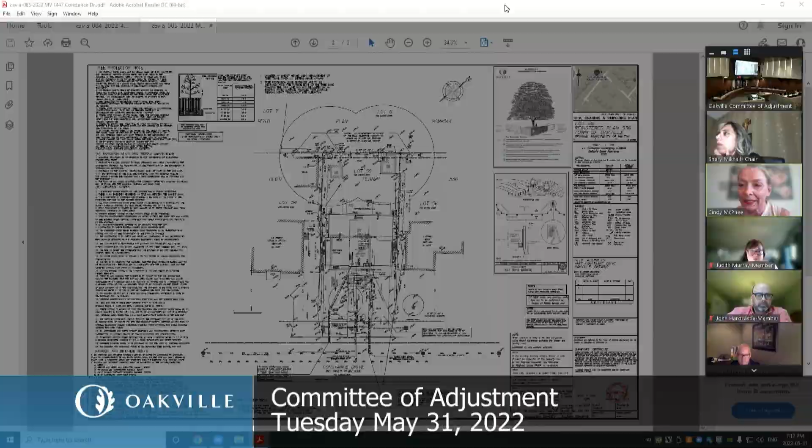I'm open to answering any questions the panel members have for our application. Very well, thank you Ms. McPhee. Are there any questions of Ms. McPhee at this time?

Would you care to comment on the issue of the tree? Is it being removed or maintained? No, the tree is being removed. We looked at that when we designed the property, and there are many trees on the property that are also being preserved. This is one tree that unfortunately is being removed because of the driveway location.

Okay, very well. Are there any other questions of Ms. McPhee at this time? Okay, Madam Secretary Treasurer, have we had anyone sign in to speak to this application? Madam Chair, if you can just repeat that anyone who wants to speak needs to raise their hand, that would be helpful. Okay, application CV 085 of 2022 at 1447 Constance Drive. If you are in attendance and would like to speak to this matter, please raise your hand and you'll be invited to the panel.

Okay, Madam Secretary Treasurer, if no one has raised their hand, we can take the matter into committee. There is no one. Okay, very well. Who would like to move a motion?

Okay, let's see if Mr. Goral has fixed his issue, because I believe you've got 2 applications before us tonight, correct? Correct, yes. Okay, so this might have actually worked better for you, because the second one is actually up on queue right now. Let's start with the first one, CAV 084-2022.

You can hear us okay now, correct? Yeah, I can hear you, and you can hear me, right? Yes, I can. Apologize for the computer glitch. No worries, we all have those.

This is application CAV 084 of 2022 at 411 Inglehart Street South. It's a new dwelling with a detached garage accessory building. We do have 2 letters of support on file from Laura and Patrick Burke, and Derek Woolman and Jennifer Chapman. Go ahead, Mr. Goral. Yes.

Good evening, Chair and committee members. My name is Tomasz Goral, and I'm the applicant for homeowners Erica and Paul Main at 411 Inglehart Street. This is our second time here. We were here before, we didn't win that time. We had 7 variances, went back to planning and worked with them. We've reduced it to 4 variances, which we do have their support for. I can go over them, but I also sent in a rendering.

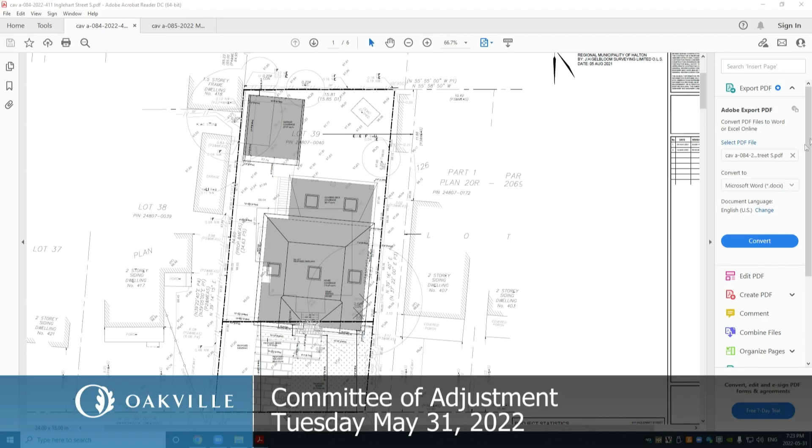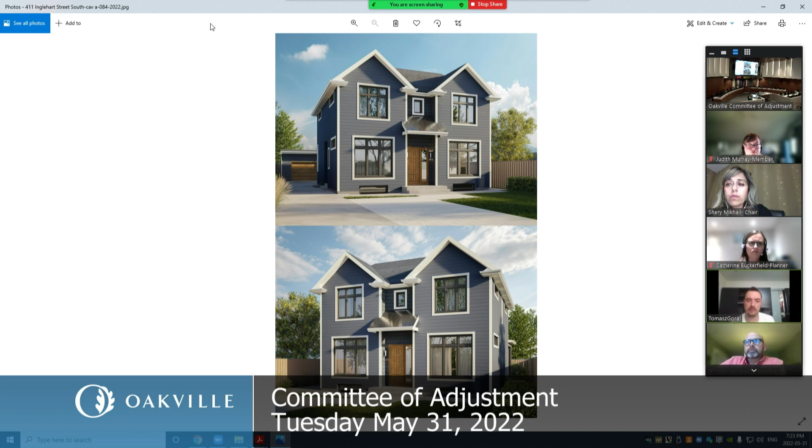Does the rendering show? You guys have that on file? Town staff, do we have the rendering for this application that was sent in? To Madam Chair, it's going to be up on the screen in a couple seconds. Perfect, thank you. Okay, so this is the dwelling we're proposing, the house we'll be building, with the garage detached in the back and the house in the front. If we can now jump back to the site plan, we can stay there for the rest of the presentation. Very well, thank you.

Okay, so one of the main drivers on this project was the garage. Originally we had it closer to the property lines. We've adhered to the 2-foot setback, so we have no variances for the garage. Because of that, we have to have the 2 meters between the garage and the house, so the covered porch was reduced in size, which is variance number 3, the lot coverage, that is less now than before. Number 1 was the window well, which we're still asking for as before. Number 2 is the 0.7% more of the area of the home. And the final point, number 4, is the front yard setback - we're asking for 8.19, because of the stairs in the front of the home.

I spoke with zoning, and even though it didn't have a cantina in the basement, because it's a covered roof, that's where the front yard is calculated. The dark line is where the front yard setback should be. As you can see on the left corner, we comply with the front yard setback there, and then it just kind of pies off. The reason the house is shifted is because the property is angular, and that's why we're asking for 8.19 for front yard setback.

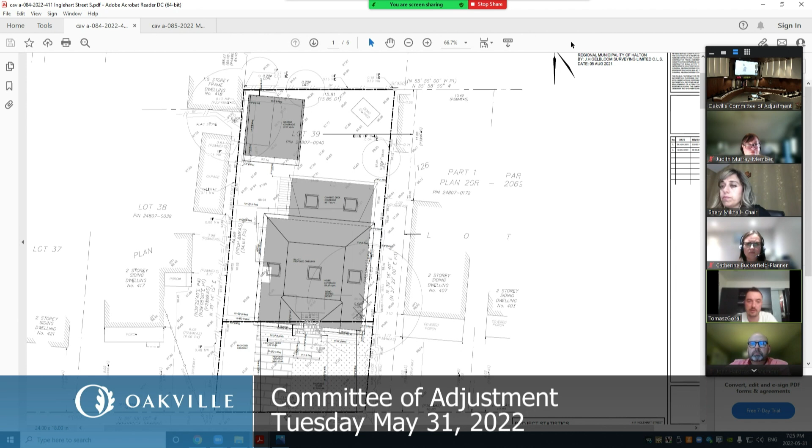So we have the planning support, and I hope we can have committee's support as well. Okay, very well. Are there any questions of Mr. Goral at this time?

Okay, I see none. If there is anyone interested in speaking to this application, please raise your hand, Madam Chair, and you'll be invited into the panel.

Okay, if no one has raised their hand, Madam Secretary Treasurer, we will take the matter into committee. Madam Chair, I'm sorry, I didn't see you there, Mr. Hardcastle. I apologize.

No, I just had a quick question of clarification with respect to the site plan and the walkway. I see that the walkway is relatively wide. Is that in fact a walkway beside the driveway? And if so, is the intention that it would be flush mount with the driveway and function as a driveway area?

Mr. Goral, I believe that question is to you. So they're pavers next to the asphalt. They're permeable, and we're going to have grass in between the joints. It will be level with the asphalt driveway, but the intention is not to use it as a parking pad.

However, if they're having a party, maybe someone will park there, but it's not for their personal use. They won't be using it as a parking pad. No, it's more of a decorative feature.

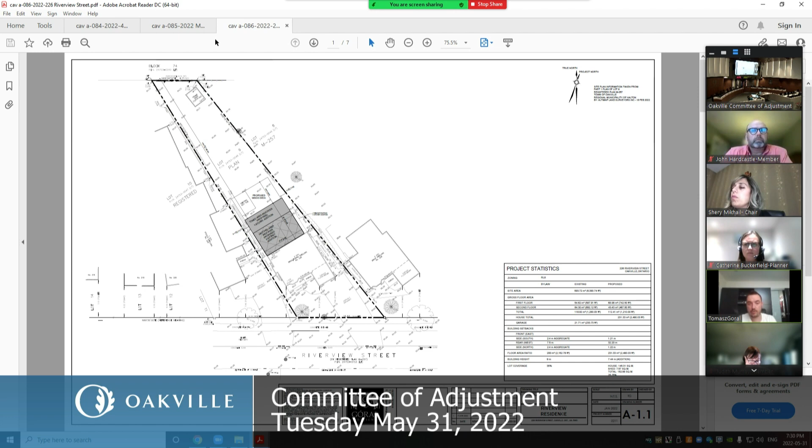I'm the applicant for Jeffrey and Christine Budd, the owners of this property. We're only asking for one variance. Originally, when designing this, we were under the impression this fell under the -0 suffix zone. The area of the property is 593 square meters, and you're allowed 42%, which translates to 249 square meters. Talking to zoning, we realized that's not the case.

This is actually an RL8 zone, and we're only allowed 200 square meters. We did talk with zoning originally. If we can look at the side elevation - those are the existing ones, and these are the proposed. The little bumper will be removed, and we'll just do a rear addition. Originally we had the addition all the way to the back, but working with planning, they asked us to cut back the second floor to where it is now. This is what we agreed to, and it's 231 square meters, 31 over. We hope to have the committee's support on this.

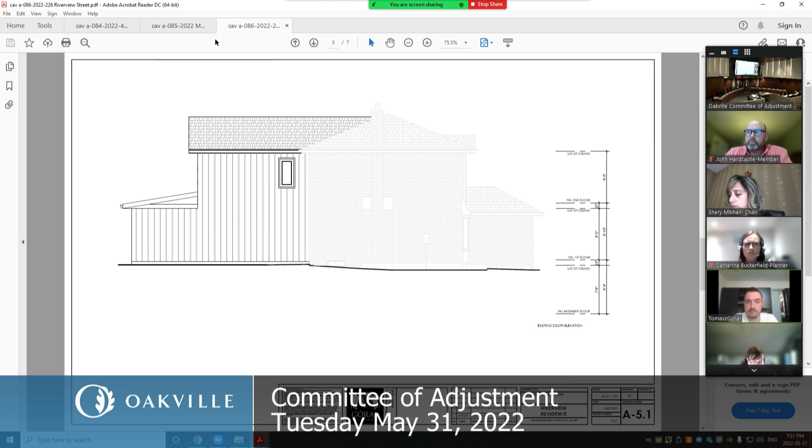Are there any questions of Mr. Goral at this time, or items of clarification? I see none. If no one's asked to speak to this application, we'll take the matter into committee.

Madam Chair, I'm prepared to move that this application be approved as applied for, finding that it meets the test of the Planning Act. Definitely some uniquely shaped lots, and as a result, the adjacent developments - I don't see any impact from the variances being proposed. I would note there is no objection from the community, and I would make that approval subject to the addition being built in general accordance with the submitted site plan and elevations dated April 19th, 2022, and the approval expiring if the building permit does not issue within 2 years.

Is there discussion on this recommendation? I see none. All those in support? Okay, your application has been approved, none opposed. Thank you very much, have a good evening. Good evening.

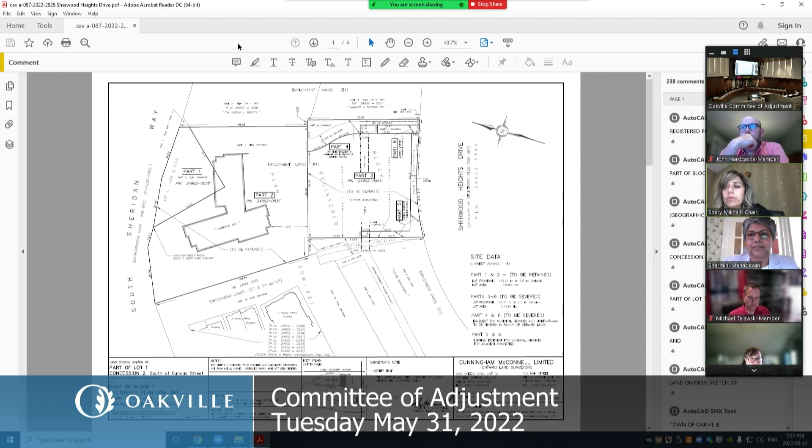Very well, thank you Ms. Mahadevan, I hope I pronounced that right. Thank you, Madam Chair, yes. Are there any questions or items of clarification at this time?

Okay, I see none. Whoever wants to move the motion, I'll kindly ask you to move a motion for each of the applications separately. Madam Chair, there has been no interested parties who would like to speak to this application, correct? Correct. Okay, very well. Go ahead, Mr. Flemington, I saw your hand go up.

Thank you, Madam Chair. Having reviewed the applicant's submission to the committee, as well as noting that the town staff written report is in support of the application, also taking into account that there was no comments this evening in opposition of the application. With regards to what is proposed, I do find it is minor in nature and meets the 4 tests of the Planning Act, and putting it back basically achieves the objective that the applicant and the town would support.

So I would like to move the motion for CAV A087 be approved as applied for, and I want to include the condition that the approval expires 2 years from the date of the decision if the proposed lot has not been created and received final approval.

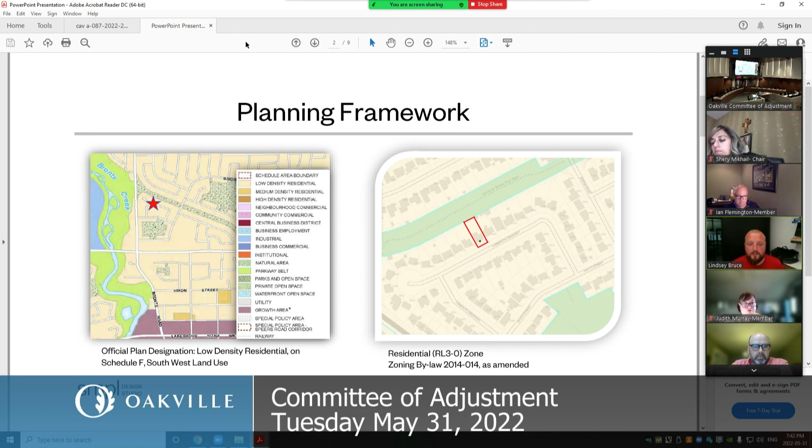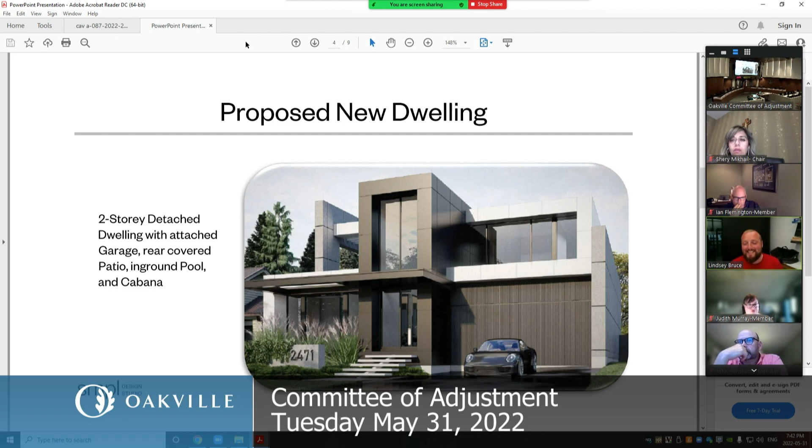Here before you is a proposal for a brand new single family dwelling, 2-car garage, concealed door on the right-hand side of the building envelope, a rear covered porch, front patio, in-ground pool, and a detached cabana. Next slide, please.

First request of variance pertains to the lot coverage currently as proposed with the cabana. We're sitting at 38.72% as our total lot coverage. Allowable permitted usage coverage is 35% in this zone.

The owners of the property, who are our clients, are going to be moving into this residence and living there full time with their family. We had a really good door-to-door session over the last couple of weeks and got letters of support from 10 neighbors. In addition to that support, there don't seem to be any objections from town staff. There are a couple comments pertaining to the height of an architectural pillar, as well as the encroachment of a window well into a side yard projection, which will be tackled in the building permit applications and grading plan process. So we're not concerned with town staff's comments on those items.

On the top image is the front elevation, bottom image is the rear elevation. There are no current proposed renders of the cabana. It is yet to be designed, but we do feel that based on what is starting to transpire on that streetscape, there is going to be some overall redevelopment of the zone over the next few years. We're hoping to lead the charge here from a contemporary modern design standpoint on Yarmouth Crescent. Definitely open the doors to any comments or feedback the committee has.

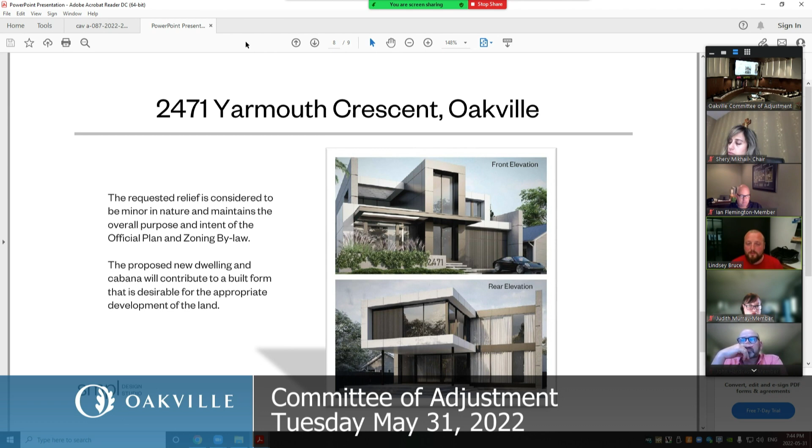I know there was one individual who was going to be joining just to listen in on the hearing this evening. There was also one letter of objection. We don't have the address, telephone, or email, so we're not able to pinpoint exactly where that residence resides. They might be here this evening to chat. It is Sandra and Rob Scott, and it is in relation to the cabana location in the rear yard and the requirement of the removal of the rear tree.

I just want to let the committee know that we've already retained Michael with GLN Farm and Forest. They are a local certified arborist company that does a lot of our planning applications and site grading plan applications. We do have a plan to remove that tree, but we are looking to replace it with substantial vegetation along the rear tree line. So as opposed to relying on one dominant tree, we're looking to replace it with several more dominant species on the rear property line to provide privacy between the Donovan Bailey Trail network and the pool that is going to be added into the rear yard of 2471 Yarmouth.

That is all. Okay, thank you, Mr. Tanner. And just for the public to be aware, you are subject to a development engineering site plan process review, so stormwater, trees, and all of that will be tackled at that point as well.

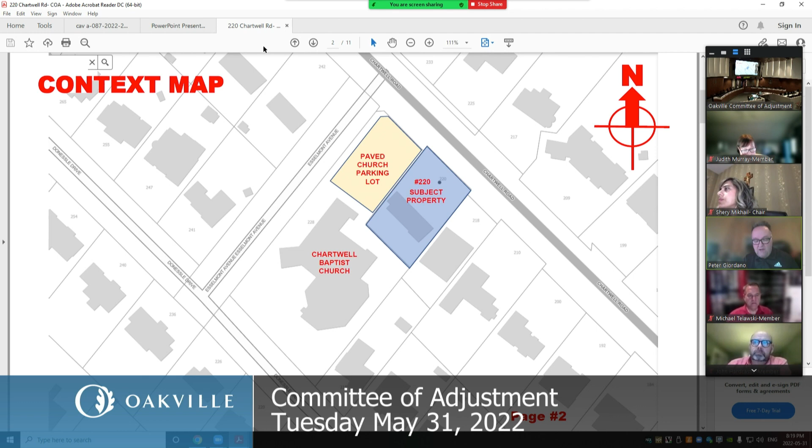We're here today requesting your consideration on 6 variance items. The context map displayed on your screen shows the unique placement of our property between adjacent residential neighbors at 218 and the Chartwell Baptist Church and parking lot to the direct west of us. Slide number 3, please.

The context aerial map shows the positioning a little bit better.

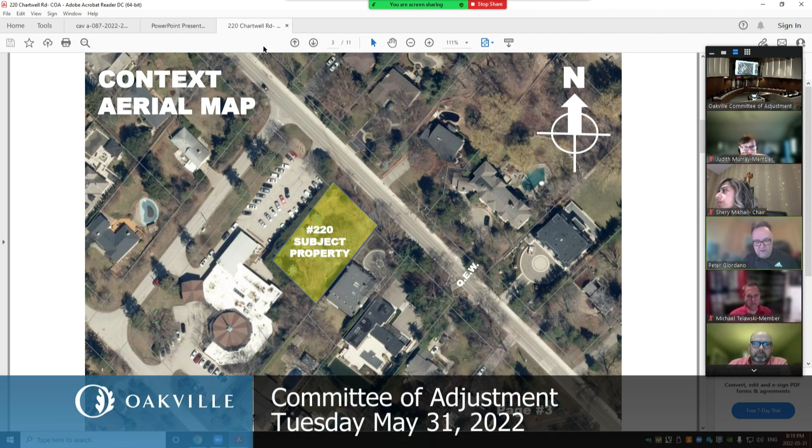Slide number 4, please. The next four slides are 3D elevations of what we're proposing. The important aspect on the front elevation is the stepping of the house, giving us an articulated front facade. We're asking for a front yard variance, which I'll discuss shortly, measured to the far right side. You'll see the articulation steps the facade back, and the two garages are secondary, positioned furthest from the front property line.

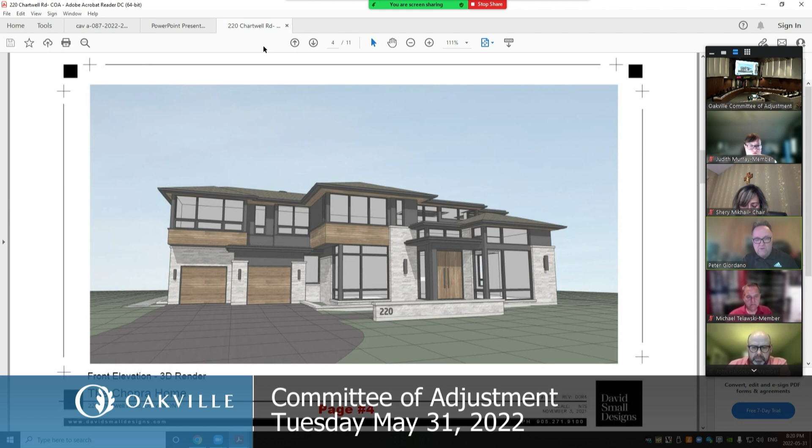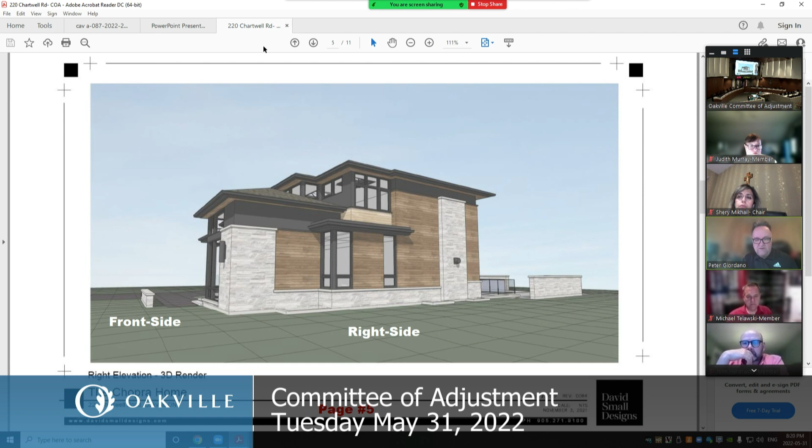Next page, please. This is the right side of the house, which faces the parking lot for the Baptist church. It's a well vegetated property with lots of trees on this side, not very many windows, but it effectively faces the church parking lot.

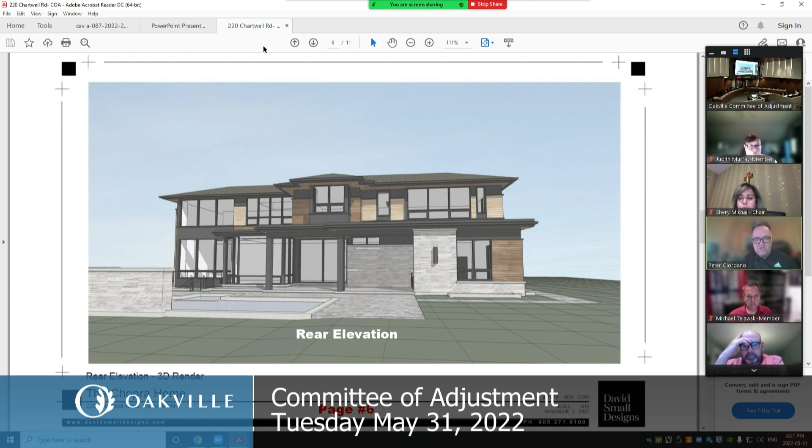Next page, please. The rear elevation has a covered porch, part covered and part open, along with a well-articulated rear elevation with a lot of facades. This faces directly towards the Baptist church, the rear neighbor of our property.

Again, a lot of vegetation in the rear provides privacy screening, which works out well for us. Next page, please. On the left side, this faces the neighbor at 218. We've purposely made the impact of this elevation smaller, so the amount of facade facing that neighbor is considerably smaller.

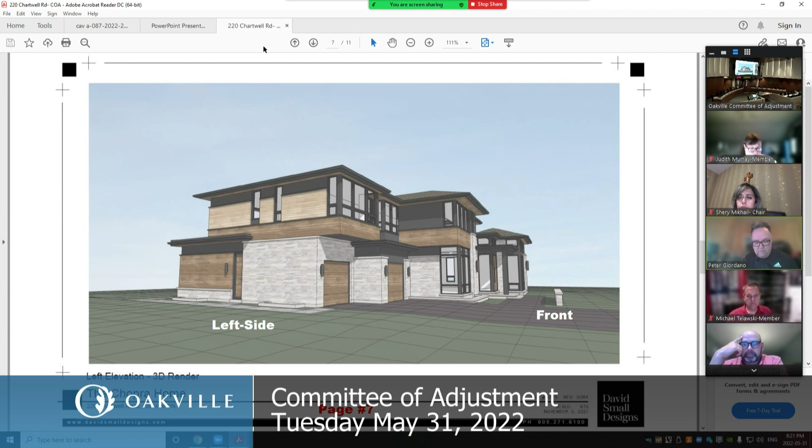Can I ask you to go to page 7, please? Again, just a few more 3D elevations showing the view from above looking down, just to show the amount of articulation we've done on the facade. Next page, please.

So this is a list of our variance items. Variance item number 1 is an increase to the width of the walkway connecting to the driveway. Required is 1.8 meters; we're asking for 2.39, a difference of just under 2 feet. We don't believe this additional width to be visually or physically impactful, although we acknowledge that planning staff comments do not support this variance out of our 6 variances. We'll leave it in your hands to determine if this request meets the 4 tests.

We believe it does. Variance item number 2 requests an increase in the attached garage area from 56 square meters to 77.8. As you can see, the garage is a stacked tandem garage in plan, but on the front elevation it's expressed as just two garage doors to make the massing secondary and lessen its size impact.

Variance item number 3 is a side yard variance, reduced from 4.2 to 2.24. Again, it's the variance that faces the parking for the Baptist church to the right of our property.

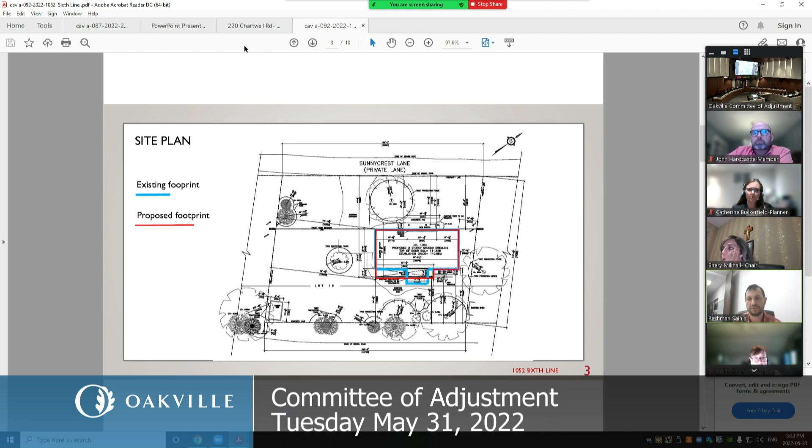So on the right-hand side, which is north, basically that line on the main floor, it is existing on the second floor. We want to align the proposal, or it would be a load-bearing wall, basically for the exterior on the main floor, which would be 3.06 meter encroaching to the setback. Next slide, please.

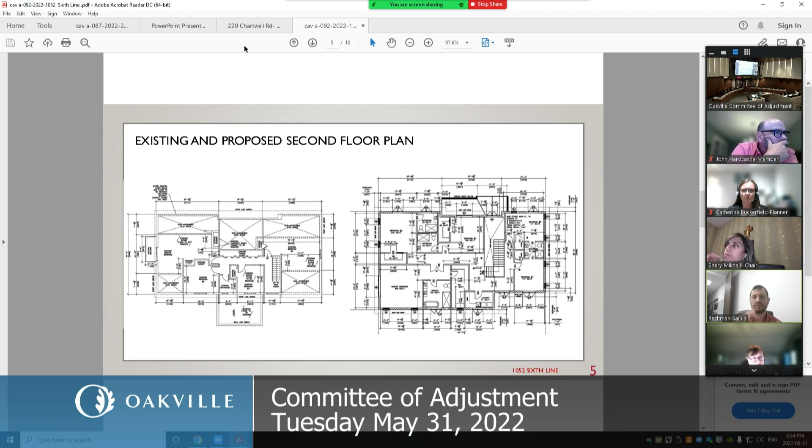This drawing shows the proposed main floor plan, which, as you see, we are keeping the existing layout or footprint, so it stays as legal non-conforming. Next slide, please. So for this second floor, we are proposing to again align with the main walls at the first floor. We use the same line, so it would be aligned with the first floor walls. Next slide, please.

This drawing just shows that we are not encroaching to any tree protection zone. We are not adversely affecting any soft landscaping area, which was on the right-hand side of this drawing.

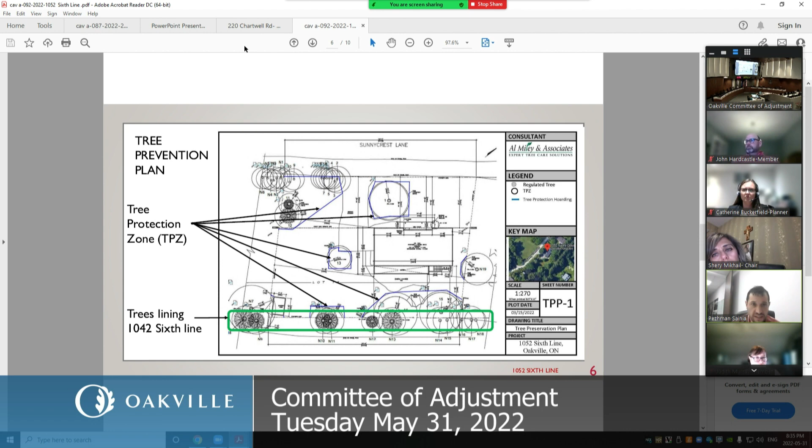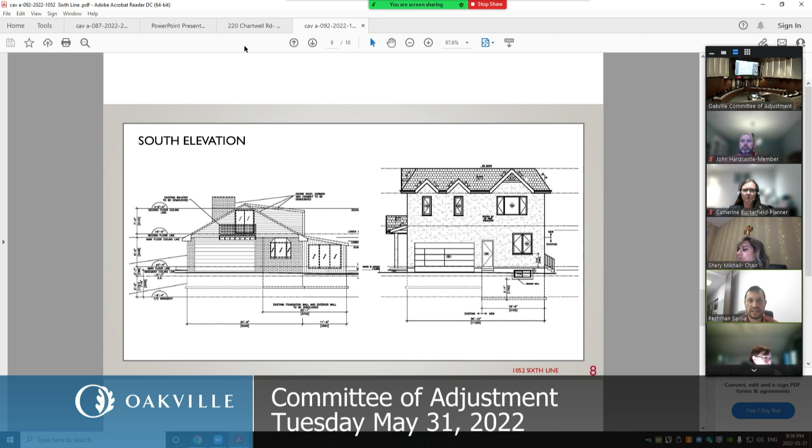This is the south elevation, which we are trying to match with the north elevation, so the two are similar to match. And this would be the north elevation that I was explaining.

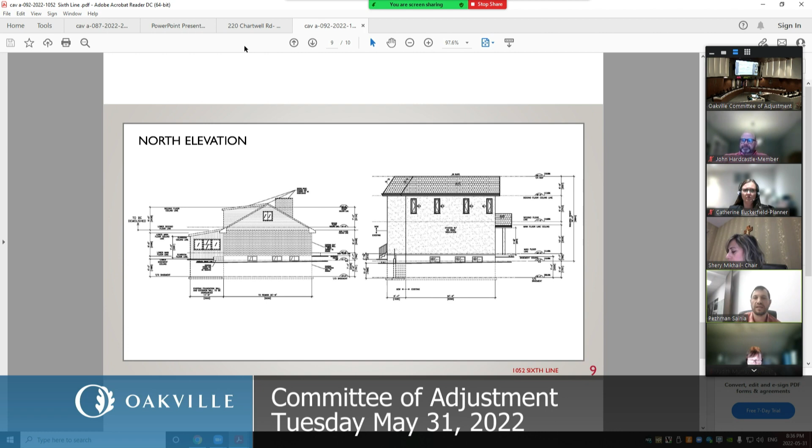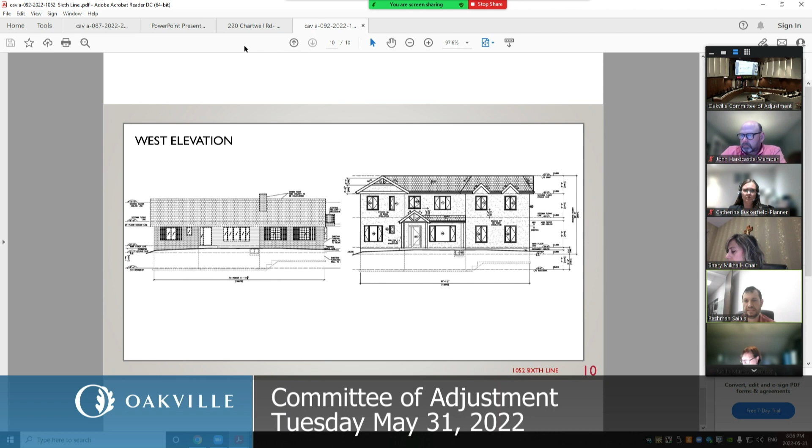Okay, are there any questions of Mr. Sanya at this time? Any items of clarification? I see none. I see that you have 5 letters of support from your neighbors, and we have those on record.

Madam Secretary Treasurer, has anyone called in with interest to speak to this application? No phone calls, Madam Chair. Okay, who would like to move a motion?

Go ahead, Ms. Murray. Thank you, Madam Chair. Having conducted my site visit and reviewed the applicant's written submission, as well as the town's written staff report, which I note that the town is in support of, having also taken into account the comments by the applicant this evening.

Thank you for the presentation this evening. I think it was well laid out, and thank you for working with the neighbors. I think that's very helpful. So, noted, of course. I note that there is nobody present to speak for or against this particular application this evening.

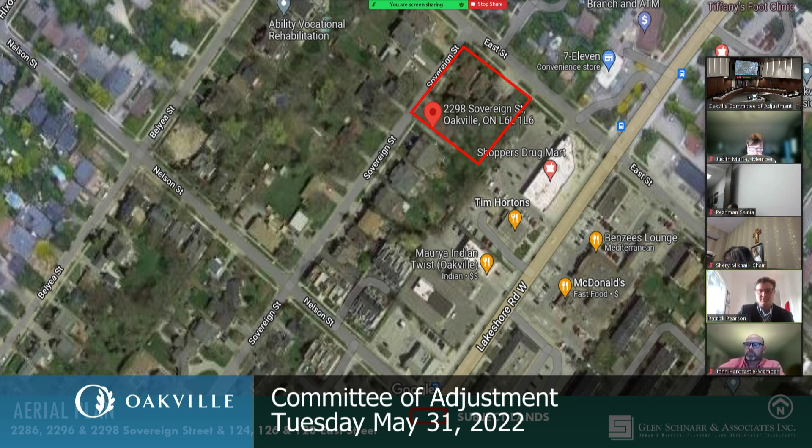Next slide, please. So I guess in order to facilitate the approval of the final site plan, the following variances are being requested. Number 1, to permit townhouse dwellings not in accordance with section 15381.1G of the site-specific bylaw, and I'll explain that later in this presentation.

Number 2, to permit the dwellings located on block 1 lands to project 1.5 meters into the front yard to a maximum of 73% of the dwelling's width, where the zoning bylaw permits 60% of the dwelling's width. Next slide, please.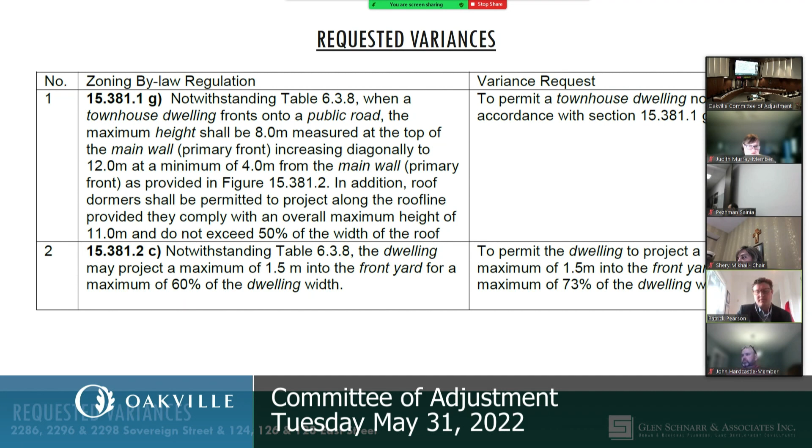So I guess I'll start off by saying that the plans haven't changed much since the initial approval of the official plan amendment and zoning bylaw amendment. There's been some minor tweaks throughout the finalization of the site plan. For example, I think the mailboxes have moved slightly, but generally the built form and massing hasn't changed at all.

So I'll start off with variance 1, the increase in the required yard projection. You can see on the top of the screen, on the north of the page, there's a red box surrounding the fronts of the units within block 1. That is where variance 1 is applied to, this portion of the site. The projection provided is intended to ensure that the townhouse block isn't just a flat wall, and it provides more variation and articulation from the street's edge.

I would like to note that this variance number 1 that we're seeking has previously been approved, although the approval lapsed because the building permit wasn't ultimately pulled within, I think, 2 years. So we're just reapplying for the exact same variance, and hopefully we'll have permits shortly. We're simply here to reapply for that variance. On that basis, I believe that the intent of the application is still being met for variance number 1.

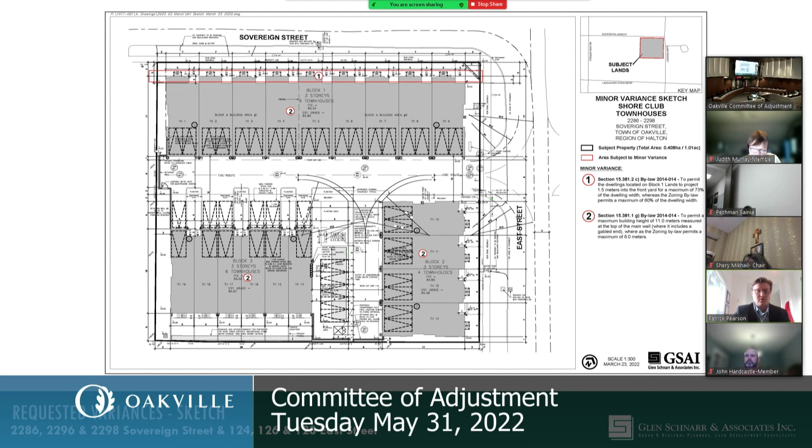You can see there's a max wall height of 8 meters, which is what we're conforming to. We're providing 7.7. However, if you can read it, as noted, it says the dormer's max height is 11 meters, but only if the dormer is no more than 50% of the width of the roof. That's where the variance is coming into question here. I've highlighted on the right where the variance is applying — it's only to the dormer.

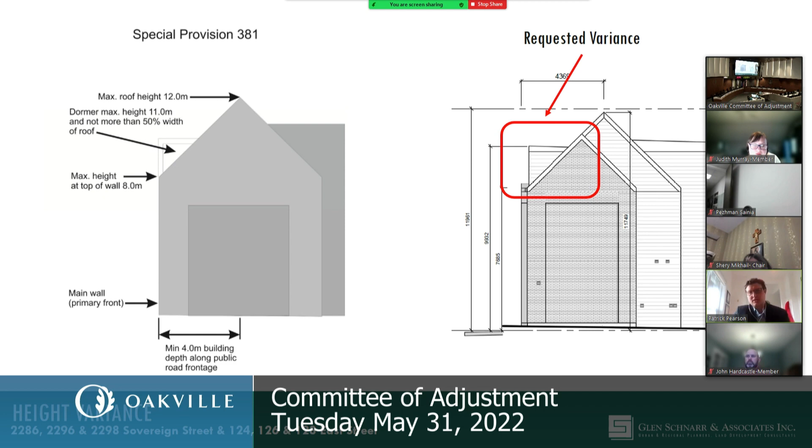So I would just like to reiterate that these plans haven't changed since the initial adoption of the zoning bylaw. I'm not really sure what happened at that time — we weren't involved with the drafting of that bylaw. We were retained after the fact, but we're going through the site plan process now, and it was ultimately flagged, and we would like to maintain the plans that have gone through these processes. So we're simply trying to bring this plan into conformance with the draft zoning bylaw. Next slide, please.

Both variances that we're requesting here tonight seem to be more technical and housekeeping issues. We're not seeking further relief from any bylaws — we're mainly just trying to bring the proposal into compliance with what was reviewed and approved at the time of the zoning bylaw. So for those reasons, we respectfully request that the committee approve this application. And if there's any questions, I'm happy to try and answer them. Thank you.

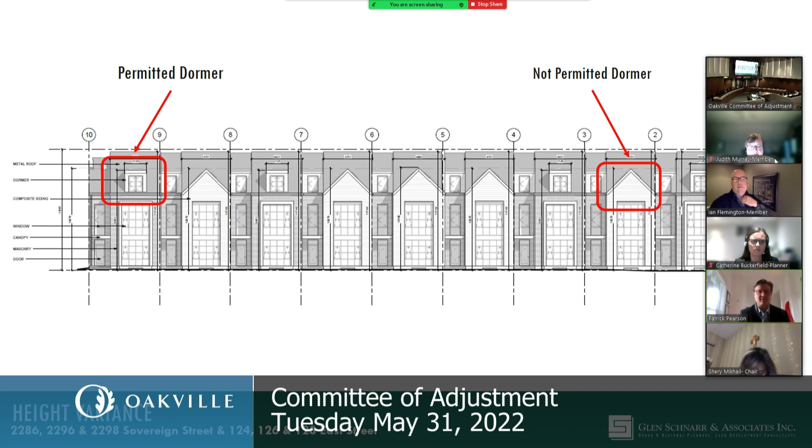Madam Chair. Yes, go ahead, Mr. Flemington. Thank you for calling out, because while we're on the other screen, I can't see anyone. Yeah, no problem.

With regards to the last image, for clarification: what was on the drawing previously up was what was submitted to the town for a site-specific bylaw to be drafted. That bylaw was drafted based on the diagram illustrated on that slide, and written with that development as illustrated. What I understand from town staff is that the interpretation of the bylaw was missing the one peak illustrated on the diagram. So this application is trying to ask for a variance that addresses how that interpretation was missed from the bylaw being written for the site specific. In other words, it was not another zoning bylaw written to exclude it, it was just the interpretation of what was submitted. That's my understanding from the applicant's agent. I don't know if that helps.

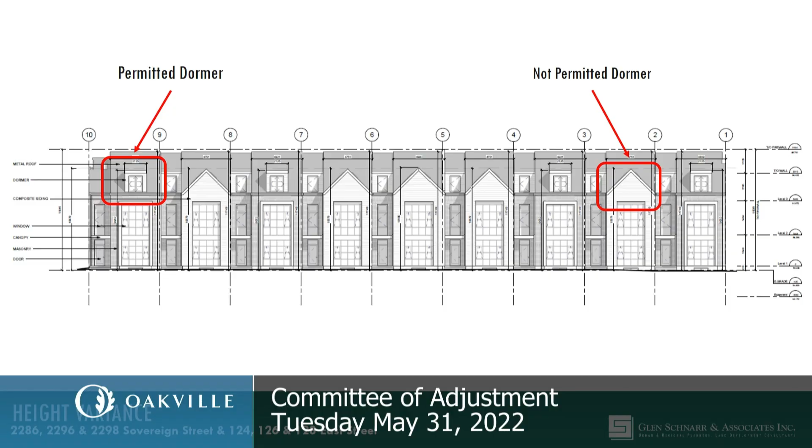Okay, the last item on our agenda this evening is application CAV 072 of 2022, deferred from October 5th of 2021, at 129 Claxton Drive. Again, it's CAV 072 of 2022, deferred from October 5th, 2021 at 129 Claxton Drive. I'll note that we do have 2 letters of opposition and 2 letters of support on record.

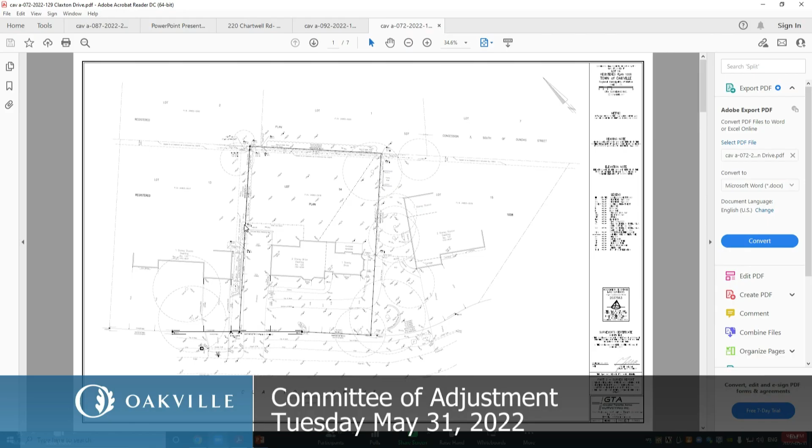I believe Mr. Gus Ricci is the agent. Is he with us? Madam Secretary Treasurer. Mr. Gus Ricci is here. Okay, very well. I'm trying to get my camera to work. There we go. Great. Very well. Go ahead. Thank you, Madam Chair and committee members.

I'm Gus Ricci, the architect and agent for the application at 129 Claxton. Just as a brief history, this application has been around for a while. We first came to committee on May 18th, 2021 with our first application requesting variances for increased height from 9 meters to 9.5, increased RFA from 29% to 34.29%, and also increased garage area size from 45 square meters to 66.3.

We had received planning staff comments that didn't support the application at that time, so when we came to committee back on May 18th, we asked for a deferral. That deferral took us to the second committee of adjustment hearing on October 5th, 2021, at which time we made some modifications to the design where we reduced the height from 9.5 to 9.36. We reduced the residential floor area from 34.29 to 32.5%, and the garage area stayed the same.

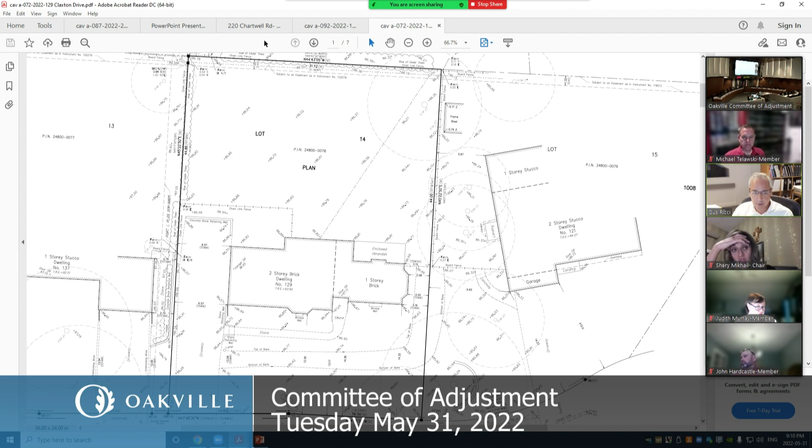We'd also like to note that on Claxton in 2020, there were two other variance applications approved: one at 158 Claxton Drive for a new home, where a residential floor area of 31.5% was approved, and also at 153 Claxton Drive, just north of our property, approved at 32.5% on basically the same size lots. So we think the development is appropriate for the area. It suits the context and development occurring in the area, and we meet the four tests of the Planning Act. Finally, the planning staff support the application, and we've looked at the conditions stated in the planning report and fully accept the comments provided. Thank you, I'd be happy to answer any questions you have.